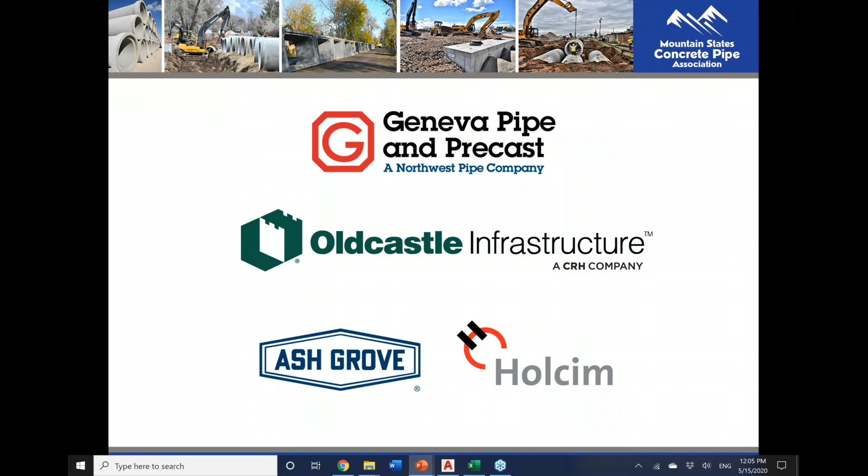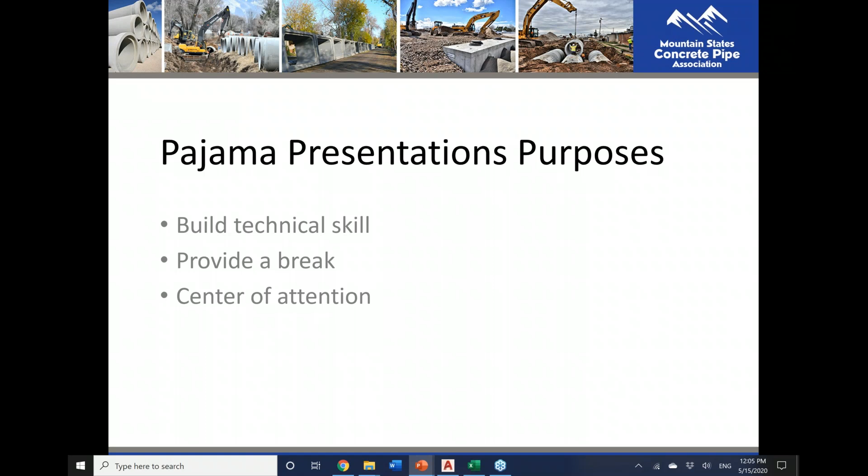Here is my pajamas today. This is courtesy of Heather Christensen, and her deciding this is what I should wear. Here you have it. There it is, my flying squirrel jammies, Heather. What is it? Is it everything you hoped it would be? I got it. From the picture on Amazon or wherever you purchased, they looked a little bit higher quality. It's actually pretty high quality, to be honest with you. It's pretty comfy. Oh man. Can we get a picture of you jumping off the garage? Yeah, absolutely. I will video that later of me jumping off the garage in my flying squirrel suit. That is not a bad idea. Not a bad idea at all.

I didn't really think these would go for so long or have any popularity at all. But I saved my pajama picture for a later one. Oh, you saved your pajama. Oh, great. Let's see. Is it PG? Yeah, can you see it? I'm not even looking at webcams, right? I'm not looking at your webcam. You bunny rabbit. It's a mountain goat.

You're a bunny rabbit. And we purchased that for Steve Oldham's retirement because someone had accused him of being the goat man that used to dress up as a goat and go up on Willard Peak. And so that's a shout out to Steve. We got him the pajamas, and they may not have been clean when we got them to him. Well, anyway, if you want, Randy, feel free to send that to me. I'll go ahead and put it in my presentation for next week.

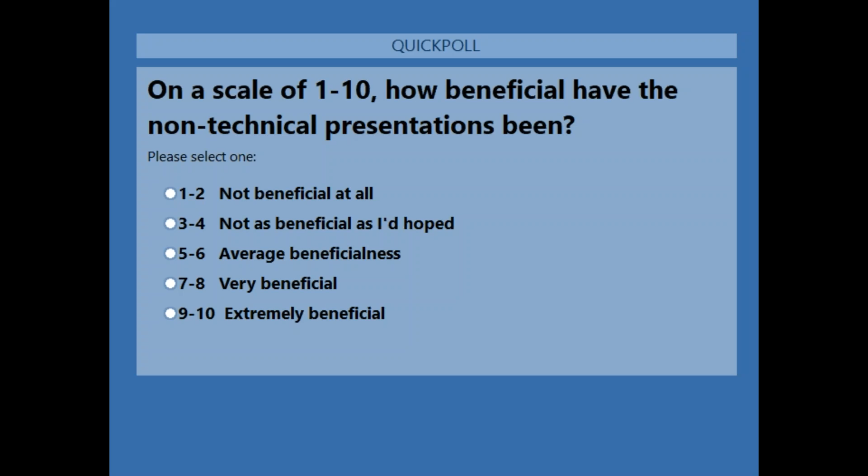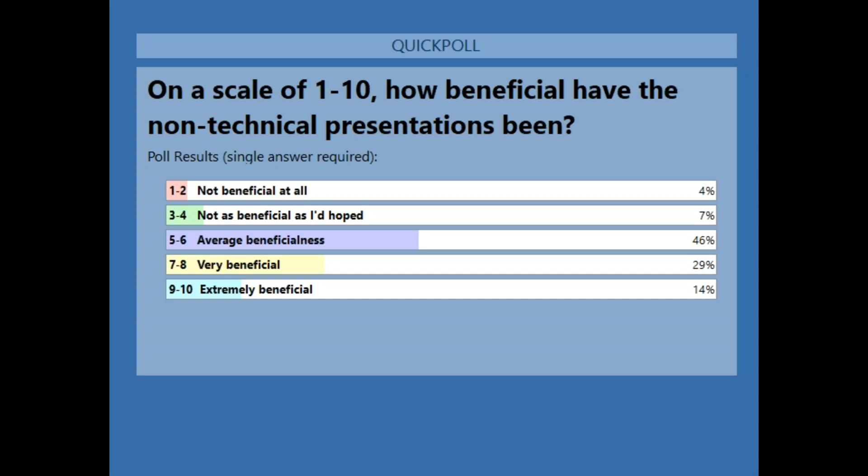Okay perfect, wonderful, wonderful. I'll give it just a couple more seconds here. Okay, I'm going to close that out and share it. Here we go. All right, so you can see it's pretty similar, but a little bit more on the high end of very to extremely beneficial - a few more that did. That's great. Excellent, thank you very much for that.

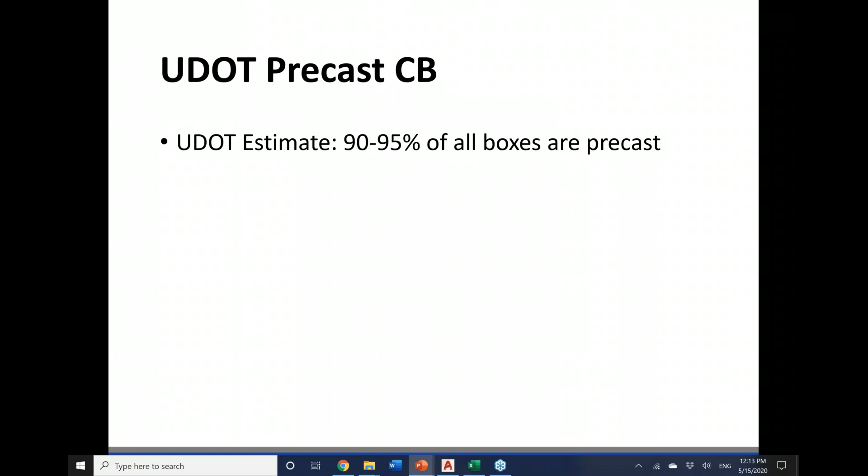So let's jump right into the UDOT precast catch basins. As we met with UDOT, we estimated that between 90 and 95% of all the boxes done in UDOT are actually precast. However, we have to do a design because most of the standard drawings are cast in place, so there's a special design, submittals, and a review and QC process. It's really cumbersome and a lot of work for UDOT and for us.

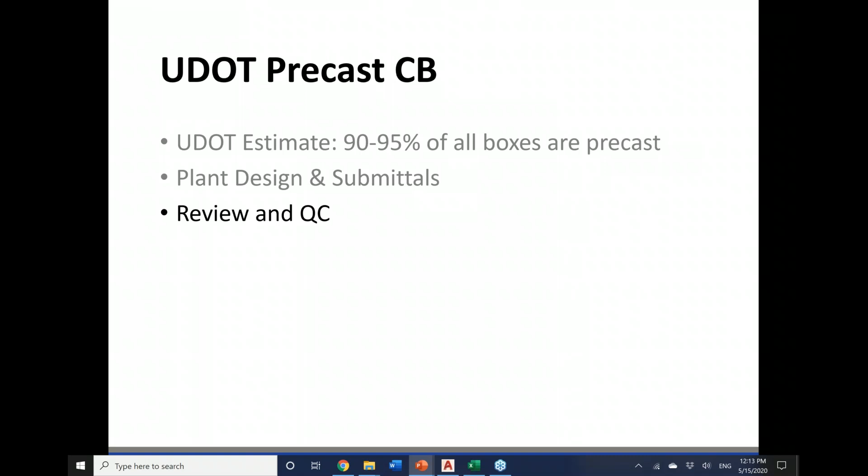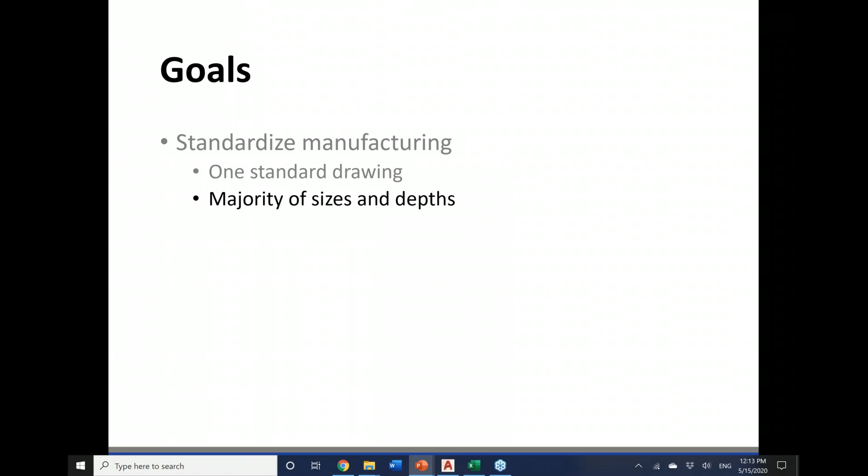So our goals were to standardize manufacturing and have just one standard drawing that would show a majority of sizes and depths so we could capture as many as we could, and also standardize the design process, as well as eliminate these large submittal packages that the REs and structures group were reviewing at UDOT. That was our main goal as we first started meeting with UDOT a few years ago.

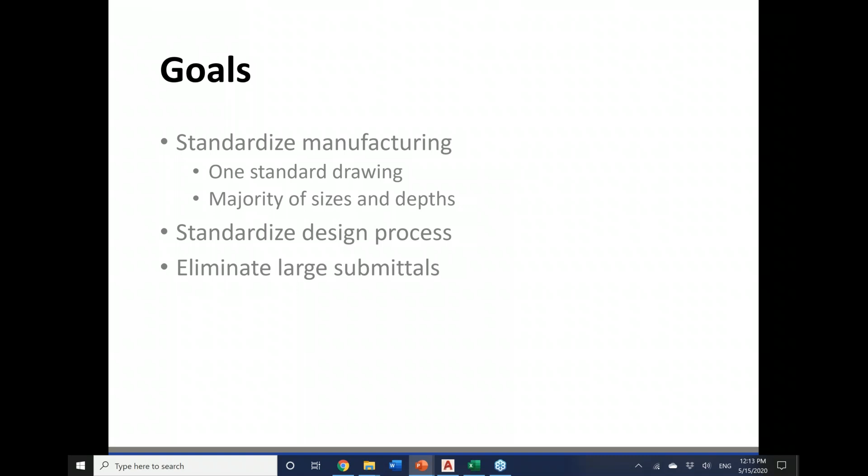This is a couple of examples. This is the CB5, a cast-in-place catch basin. You can see it goes from 4 feet to 8 feet in length, perpendicular to the grate and the direction of flow of your storm drain. It's a standard 5-foot width, and that's your outside width, so that would be 4 foot internal typically, and that goes from 4 feet to 12 feet deep.

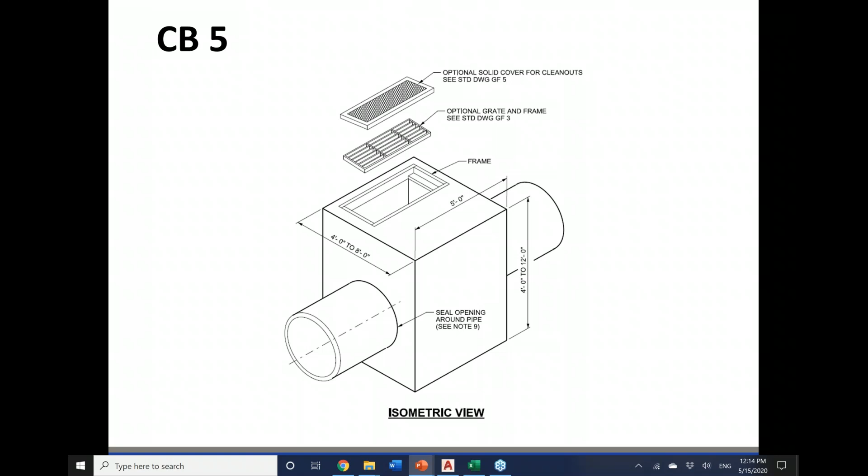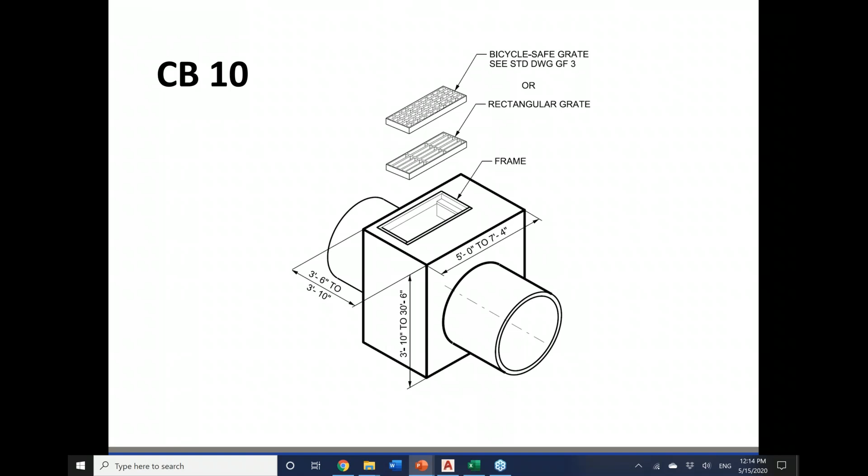The CB9 is kind of similar, also a cast-in-place drawing. This goes 4 feet to 8 feet, perpendicular to the flow where that pipe is showing, and it's typically about 5 feet wide, but this one goes from 3 foot 10 inches to 30 feet 6 inches deep. CB10 is similar, but it's the opposite direction where it can go wider, so if you need your pipe coming into your box on the other side, this is where the CB10 is.

Now a few years ago, and Randy was involved in this, this was before I got there. I want to say it was about 10 years ago. Am I correct, Randy? Or was it a little bit longer? When was it, 2012? Probably about 10 years.

Okay, so about 10 years ago, the Mountain States Concrete Pipe Association and our manufacturers went to UDOT and said, we need to have some option for precast because we're doing so many precast things, let's look at adopting a precast drawing. So they put in this precast spec, or standard drawing.

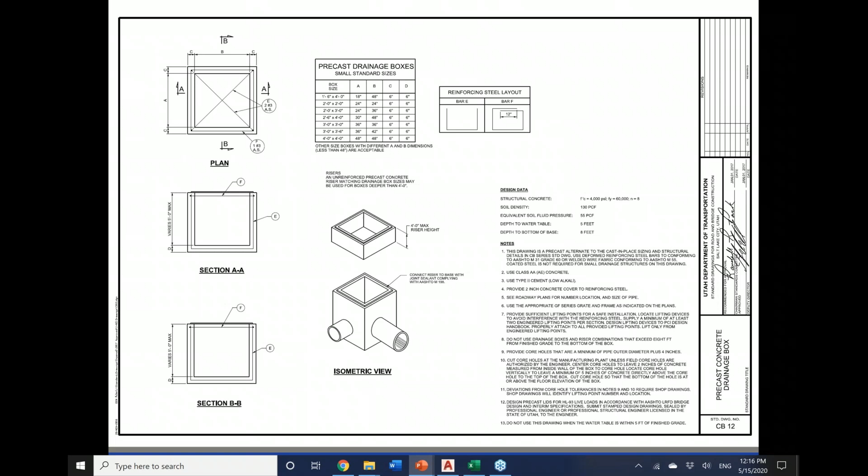This is CB12. A couple things about this though, this is why we're trying to update these now, is there are some restrictions here. Number one, it's non-reinforced, so we're restricted on how big and how deep we can go. That means there's really no structural steel in any of these boxes, only handling steel. You could see that on section AA and section BB, there's a little bit of steel, but that's just in the corners for handling so the box doesn't get damaged while we're transporting and moving it around.

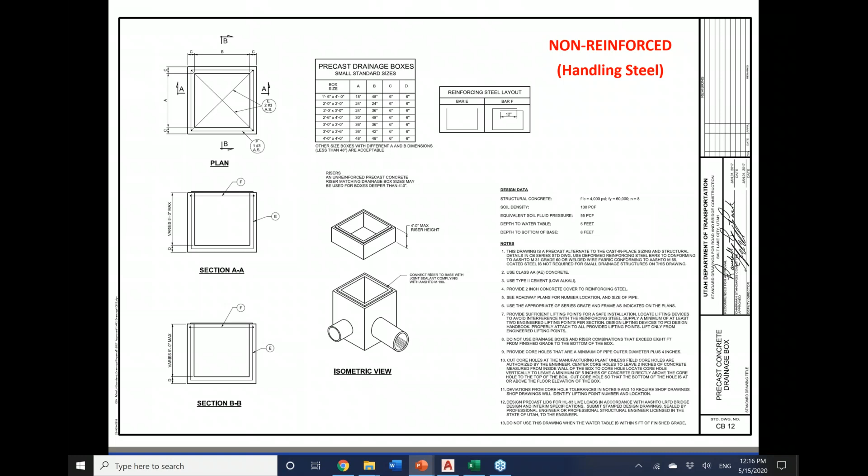As you look over here, this is the sizes of the boxes that you can go. I'll zoom in on that in a moment and show you a couple other things. The depth to the bottom of the base, the maximum depth from the top of your grate to the bottom of the base, not the flow line but the bottom of your base, is 8 feet.

So that's the deepest that we can go on these. We need to provide core holes that are a minimum of pipe diameter plus 4 inches, which would be 2 inches on either side. So if you have a pipe diameter of 18 inches, the outside diameter of an 18-inch pipe with 2.5 inches thickness would add 5 inches. So your 18 inches becomes 23 inches. Add 4 inches and it's 27 inches.

So keep that in mind. You need to cut the core holes at the plant, and center the core holes to leave 2 inches of concrete measured from the inside wall of the box to the core hole, and locate the core hole vertically to leave a minimum of 5 inches of concrete directly above the core hole to the top of the box. That's something to keep in mind, and we'll talk about that later.

Do not use this drawing when the water table is within 5 feet of finished grade. So if your water table is above 5 feet, say 4.5 feet, you're not allowed to use it. Now the interesting thing is, what if your box is only 4 feet deep and the water table is at 4.5? Unfortunately, you still wouldn't be able to use this even though the box is above the water table.

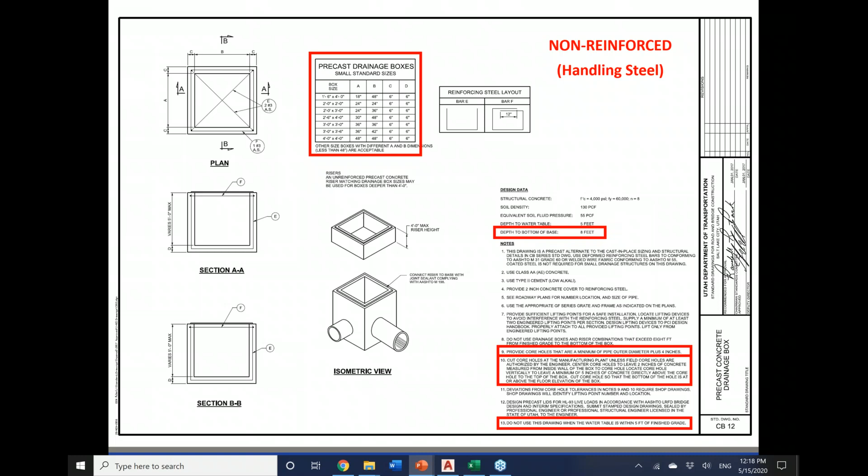It's kind of interesting. All right, I said I would zoom in on that box. These are the sizes that you're restricted to right now on CB12. You can go a 1.5 by 4 foot box all the way up to a 4 by 4. And remember, only 8 feet deep to the bottom of the box.

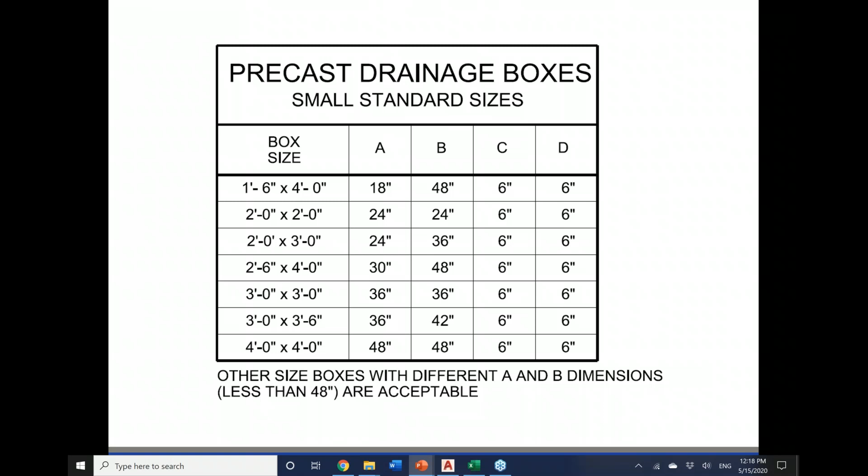There's quite a few applications you can use this on, but unfortunately, if you get deeper than 8 feet, or if you have a pipe that's a little bit larger, which we'll go over today to show you your restrictions, then you're going to have to use one of those cast-in-place drawings for now until we get these other ones done.

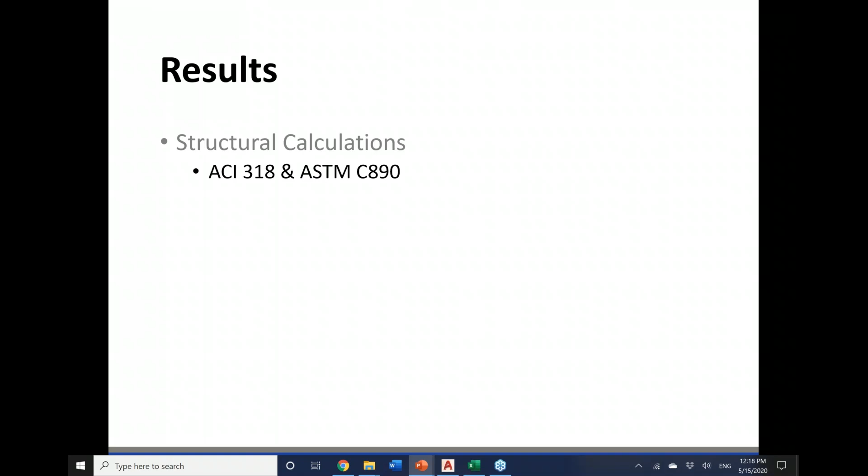We've been doing these structural calculations according to ACI 318 and ASTM C890, and also designed per AASHTO LRFD. Our goal is to put together one standard drawing that would replace CB5, CB9, CB10, and CB12, so we'd be able to consolidate from 4 standard drawings down to just one.

Now, the other standard drawings would all be archived and could still be used if you had a situation where you needed to use cast in place. But for the most part, we're hoping that most people will realize that if we're already doing precast, we can just call them out on this.

And it's going to really simplify the inspection, the RE reviews, the structural reviews, and our submittal process as well. And then we would have a process for special design. So if there's any sizes or any depths, or if there's unusual circumstances, we would have a process for how you can go through and design those.

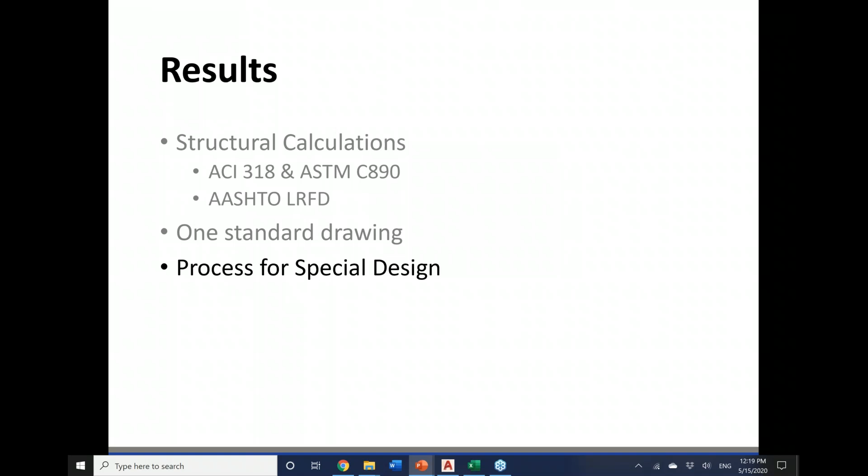And that would mostly be for the manufacturer, so the design engineers shouldn't have to worry about that too much. But that's just for us as manufacturers on what process we need to follow if there's a special design.

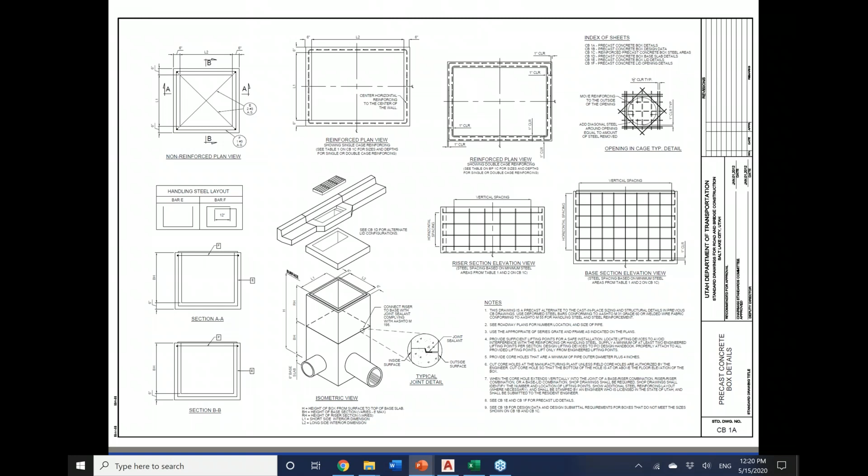Okay, so this is what the drawing looks like currently. This is kind of in a draft form still until we get this finalized in the next couple of months and get it approved, but this is what it would look like. It's similar to the CB12, kind of based on that, but it would give you all the dimensions and everything of the steel and how that works. This is the second sheet that we've put together.

What's cool about this is we have this table. This was requested by our good friend Jeff Erdman. This just is a great table that would show all the design engineers what the acceptable grates and frames are based on box size. So you could look at this table, and if you say, I have a 4x4 and I need to use a GF15, you go over and see, yep, I can use a GF15 — that is acceptable in that 4x4.

Or if you say, well, I've got a 2x3 box, can I use a GF16 in a 2x3? You go over and see, I can't. So it's just a good check there. The other thing that Jeff asked us to put in there that I'm really excited about is this skew angle.

A lot of times, and we'll talk about skew angles today, but a lot of times when we come in at a skew angle, it affects the size of box we can use. So this is the minimum L1 or L2, which if I go back to table 1, that just gives your length, right? That's the size of your box. And that would be the dimension of your box there, and that would be your inside dimension, okay?

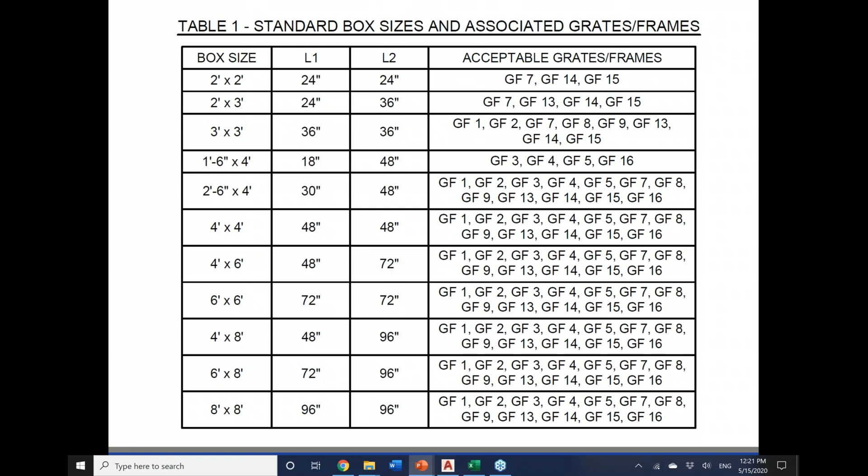So your minimum lengths based on skew angle. So if you had a 30-inch pipe, for instance, and you came in at a 25-degree skew angle, or we'll keep it easy, you go to a 20-degree skew angle, it would be 4 feet width. So you would have to have a minimum 4x4 box. And if you needed a 27-degree skew, then you would go up to the 30, and that would be 30 degrees, and that would be a 5x5. So now you would need to increase the size of your box.

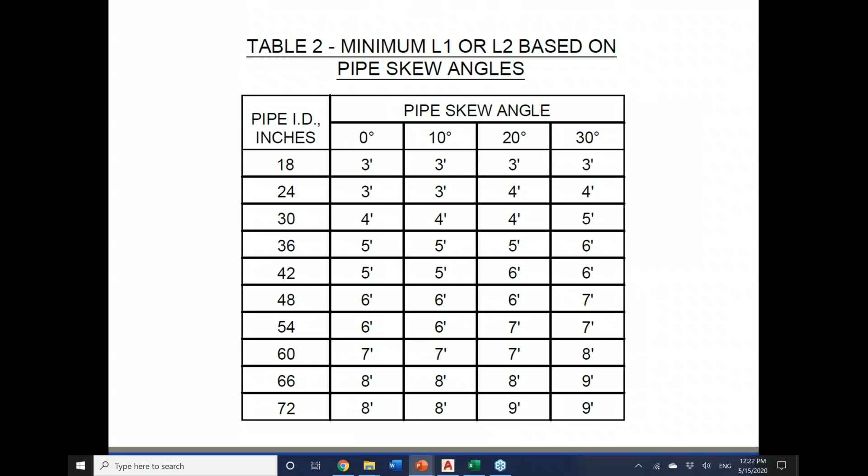But this is a good check for designers so that they can check their skew angle to make sure that their pipes can fit. Now in that handout, hopefully you all had a chance to download it, you'll be able to go through and calculate this if your skew angle is different, or if you have multiple pipes coming in and different things, and just a good check. So I've got all of that included in that handout, and we'll be walking through that today.

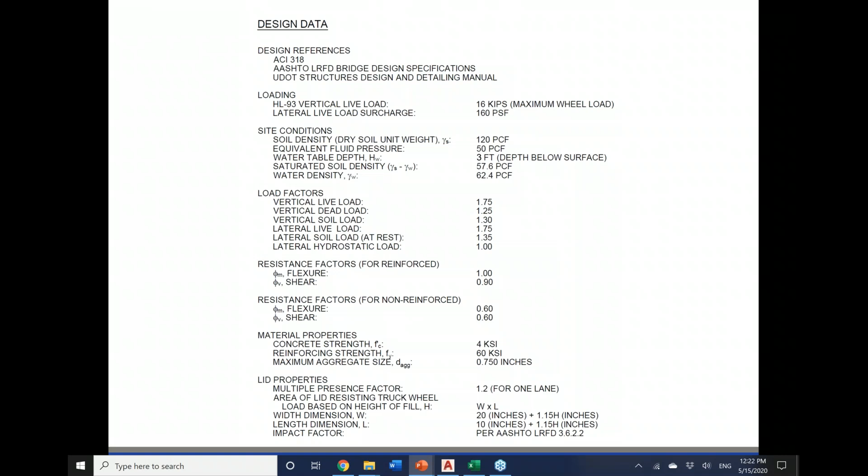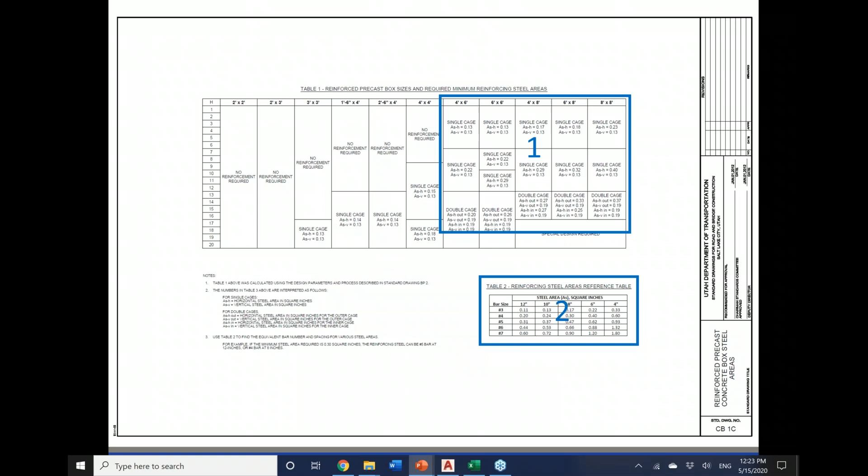And this is what the new table will look like, something like this. This just gives you the dimensions. I'm going to zoom in on this area here, and then on this next. So the first area, I've got my 4x6 box on the left, and then I've got incremental depths going all the way up to an 8x8, and it says up to 6 feet. Each of those require a single cage. Up to 12 feet, they all still require a single cage, and you've got your horizontal and vertical steel areas, in square inches, what your steel area needs.

If you notice, once you get past 12 feet deep, you need to change to a double cage. So it would be a double cage situation where you've got your outside steel and your inside steel, and then you've got your horizontal and vertical steel areas. So it's a little bit easier to read than the other one. This is just a reference table here.

So maybe a manufacturer has a bunch of number 4 bars laying around, and maybe the steel area required was 0.29, right? So they would say, all right, it's 0.29. If I'm using number 5s, I could do number 5s at 12 inches. Or if I'm doing number 4s, I could do number 4s at 8 inches. So it all depends on the availability, how quick the manufacturer can get those in, what they have in stock. So it really allows some flexibility instead of just saying in the design, you have to do number 5s at this, number 4s at this, and that's typically how it's been in the past.

But this gives them the flexibility. You can save some money and some time, and it's going to make it really nice for the manufacturers to be able to adjust on the fly like that. So for example, a 4x4 box 10 feet deep. This is just a quick example we'll do. So we go over to the table, we look in this area here, we zoom in, we go to our 4x4, we go to 10 feet deep.

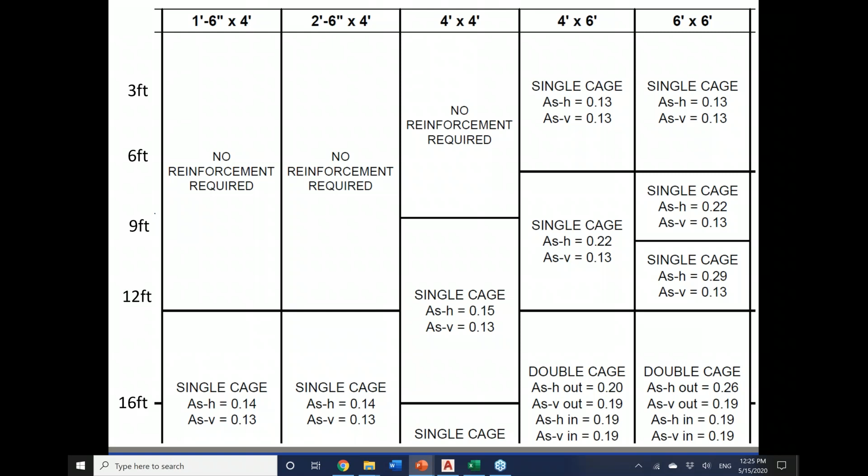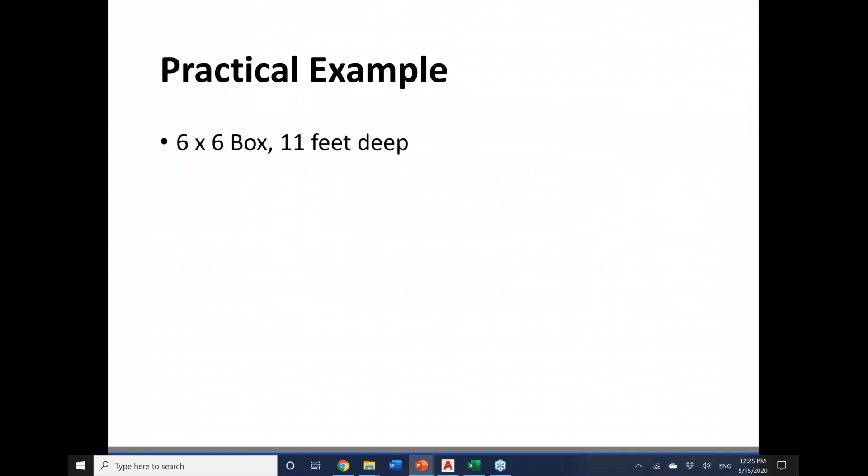Let's look at another one, 6x6, 11 feet deep. All right, so again, we go to our table, we go over to this side of the table, we would pull that up, a 6x6. Here, we zoom in. Hold on here, sorry, I forgot. 11 feet deep, sorry, I got distracted. 11 feet deep, so we go over to here. We look in that group between the 9 and 12 feet. It's a single cage. Horizontal steel is 0.29. Vertical steel is 0.13. So it's in that little box there. So we would go 0.29.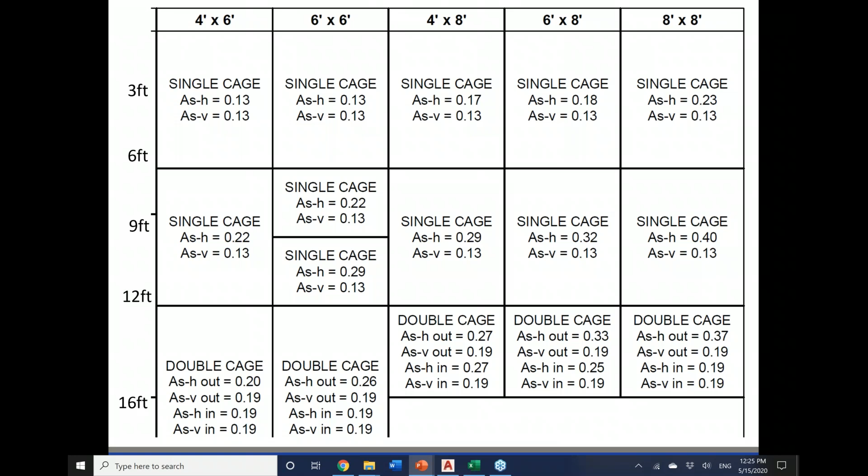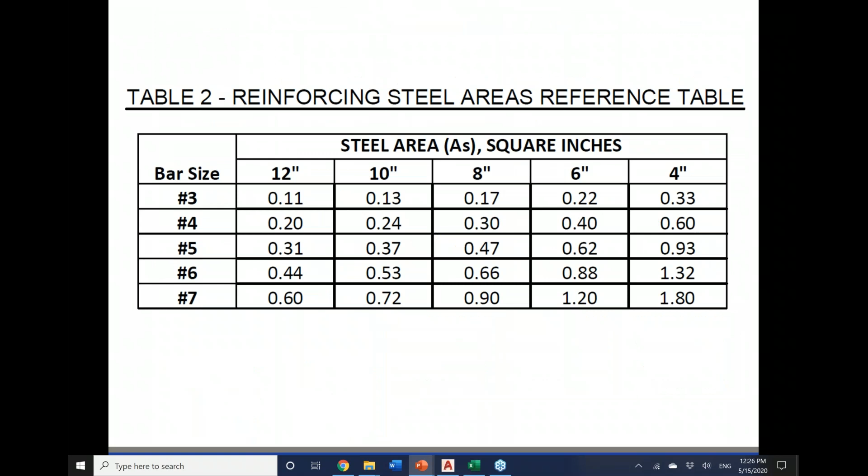You'd come over to this table and say, okay, I've got number 5s, I want to use number 5s. We're going to go number 5 at 12 for our horizontal steel. And for our vertical, it's a minimum steel, so it's 0.13. So we'll go ahead and just use number 3s at 10 inches there for our vertical. So that'll make that easy there. So it really gives some good flexibility to our manufacturers, and we're really excited about that.

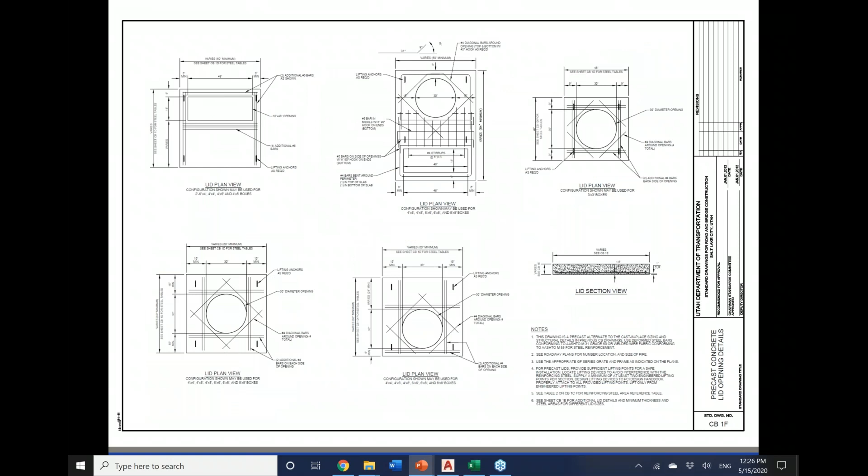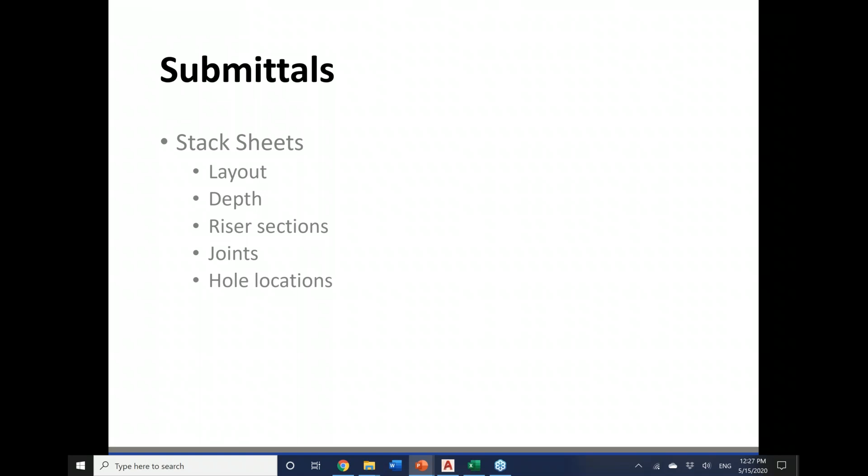However, right now, with every individual box we do, we have to submit a design. So we would have to go through and do calculations and design and show that what we're proposing for precast works. When these standard drawings are approved, we'll be able to get rid of that design component of it, but we would still have these submittals of these stack sheets. So I'm going to go through and show you some of these stack sheets here. This is what a typical stack sheet looks like.

I want to point out a couple of things. If you notice down at the lower right hand corner there, you see where it says right, back 48, left 48, front. This shows the hole locations. In that table, you can see there's 18-inch concrete pipe coming in invert 1, a 12-inch concrete pipe in invert 2, 18-inch concrete pipe in invert 3. So notice that because of how this box is sized and depending on how we manufacture it, 1 and 3 are really good. We can make that work. Unfortunately, notice that number 2 is right in the middle of that line there.

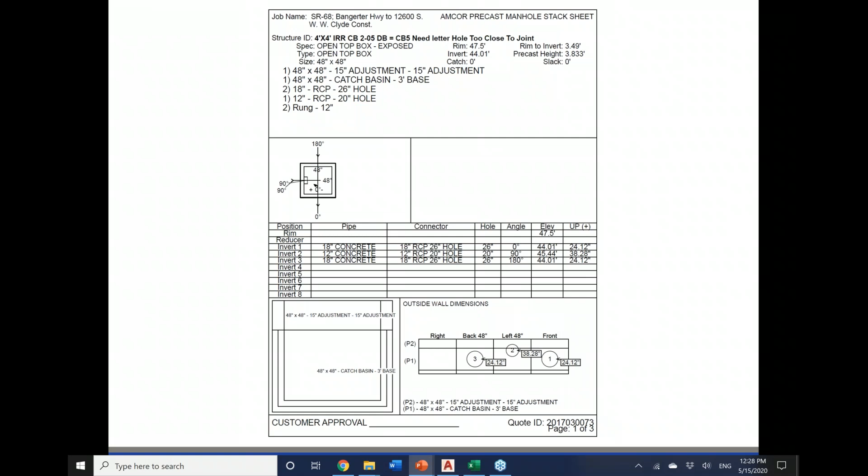So what we've been requested on this pipe here, I don't know if you could tell, but it says over on the left-hand side, 48 inch by 48 inch, 15 inch adjustment. And so that means the contractor is planning on pouring the lid in place out in the field. And so we're not able to have our riser go up. So unfortunately, there's a core hole there that's going to be right in the top of the box. And this is what we try to avoid as much as possible. But unfortunately, there's times where it's just unavoidable.

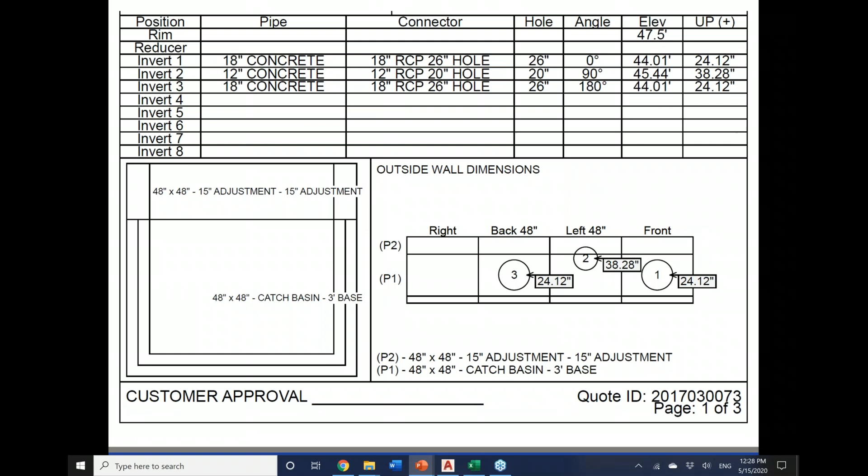And so it's really interesting there where you've got that situation where the top of it there doesn't quite fit in the riser. This is a situation that we have to address case by case and look at there. So hey, Jason. Yeah, Randy. As much as we'd like to avoid that, there's a lot of shallow drainage where we just have to deal with that. But where they're pouring that lid out in the field, it is really easy for them to tie that back together, and it works out fine.

Yeah, we had an example. Someone showed us one time, and this is where it's great, where they do that cast-in-place lid where they pour it out in the field, and they're able to reinforce around it and put that in there. So it is good. We had a situation one time where I think it was Jeff that showed us a picture where the pipe was put in and then the contractor used a precast lid and it sat on top of the pipe, and it was about 2 inches above the top of that riser.

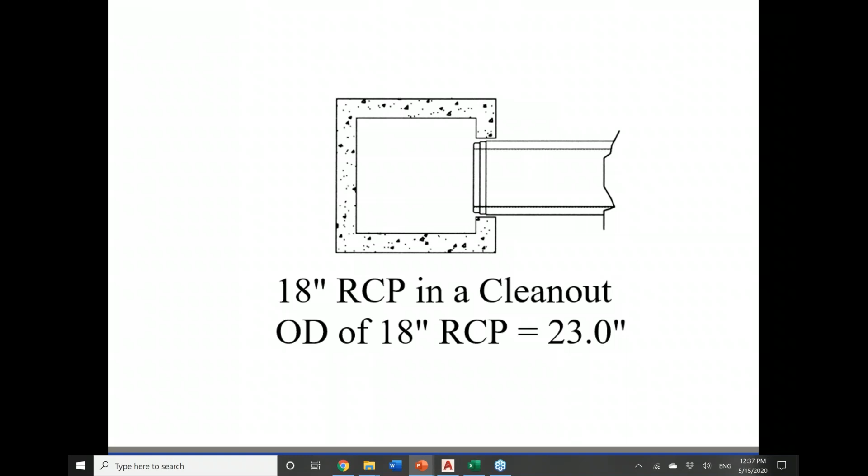Let's look at this. This is also on that handout here. This is what it looks like with an 18-inch RCP, and the cleanout outside diameter of 18-inch RCP would be 23 inches. So we look at that and it comes in at that. Now, when we look at a 15-degree skew angle, this is the calculation that Randy actually did for all of these. He populated this table based on this calculation here. Your 18-inch RCP coming in at a skew angle of 15 degrees. So you take your outside diameter, and then you times it by 1 over the cosine of 15 degrees, plus the tangent of 15 degrees times the wall thickness.

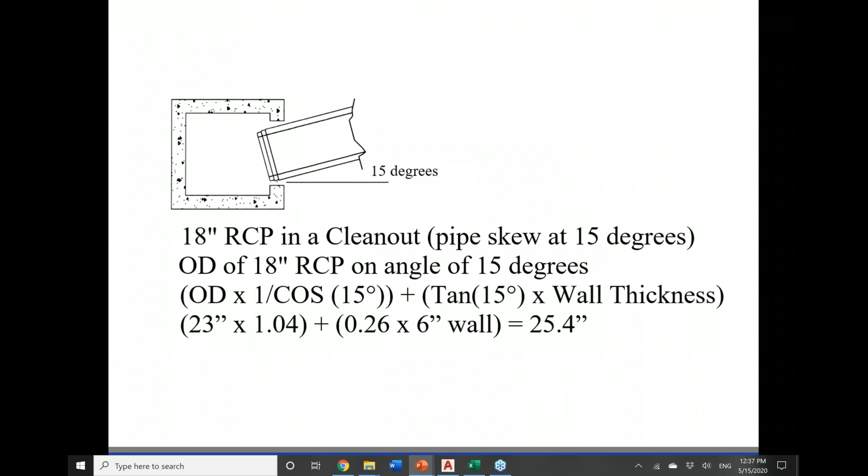Which would be your 23 times 1.04 plus 0.26 times 6 inch wall. So you get 25.4 inches is now your new outside diameter. So that's the calculation that was used to populate this table. So instead of doing that calculation every time, you can go to the table. Here's our 18 inch.

If it's a 0 degree skew, it's 23 inch outside diameter. If it's a 15 degree skew, it's a 25.4 inch outside diameter. So keep that in mind when you're thinking, okay, will this pipe fit if it comes in at a skew angle?

Now, I know there are some programs. When I was doing design for UDOT drainage projects, MicroStation had the storm and sanitary I was using. That would typically calculate and try to do that. But I always go through and check by hand as well. Just look at this table and make sure that I sized my box correctly.

I don't want to miss anything and get out in the field and realize I called out a 4x4 and I should have called out a 5x5. So keep that in mind. And that's why we're trying to put that table on the UDOT one too, to help you see. And that's what we based it all off of, this table.

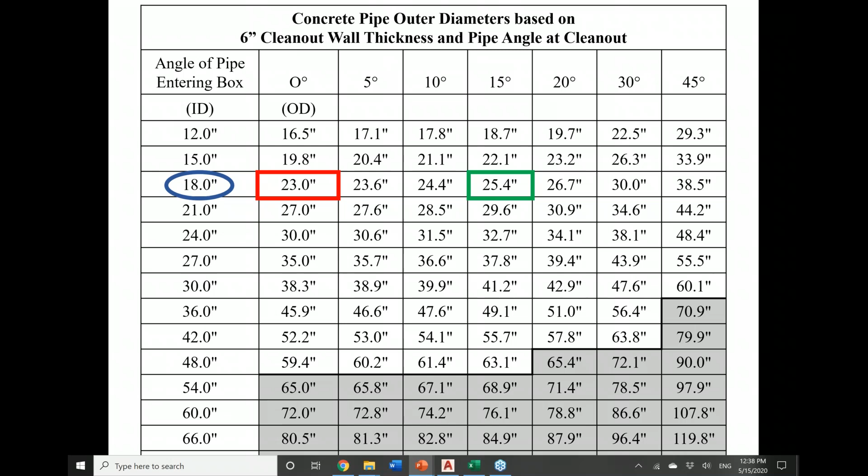We don't typically see many 21 inches anymore, but if you dig up old pipes, sometimes you'll see a 21 or a 27 inch. But you could go a 15 or an 18 inch pipe in a 3 foot box, but you couldn't go any bigger than that. So your 24 inch, you'd have to go up to your 4 foot box.

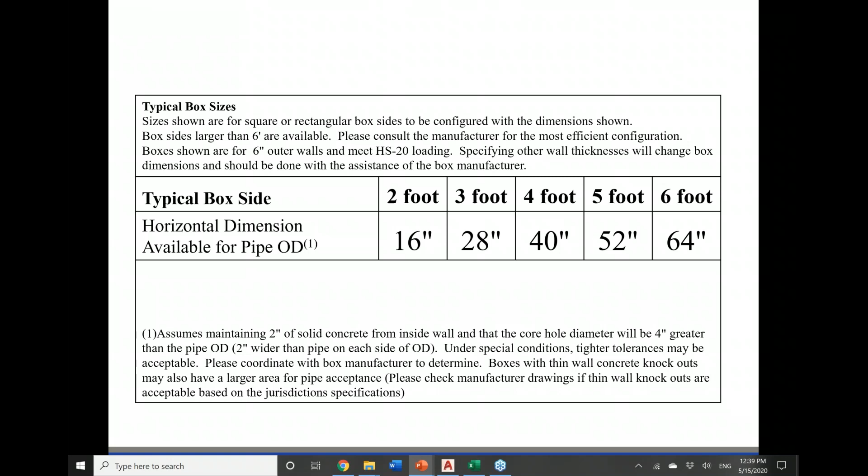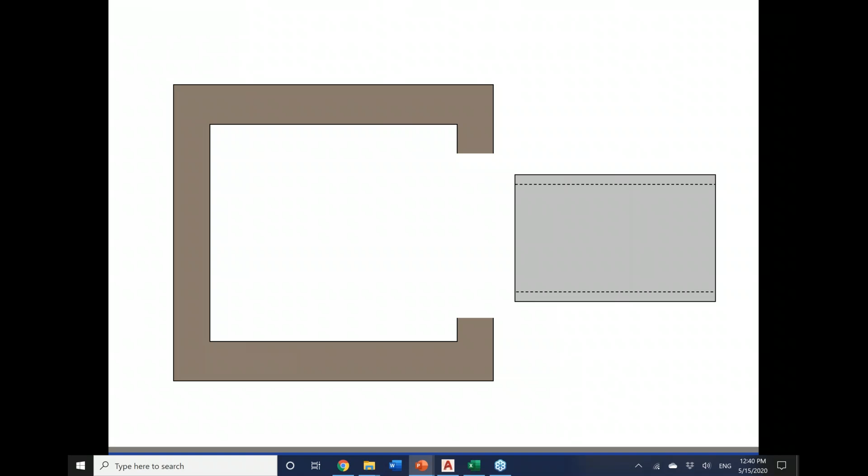So this is the situation that we see sometimes, where you've got your box with the hole that's available there, because you've got to keep a couple of inches on either side of it to make sure that we're okay. And we don't want to see this situation out in the field. This is much better. So make sure that we're checking that out. All right. And that goes through the first couple of pages of that handout.

Okay, we'll let you keep going here for a minute. All righty.

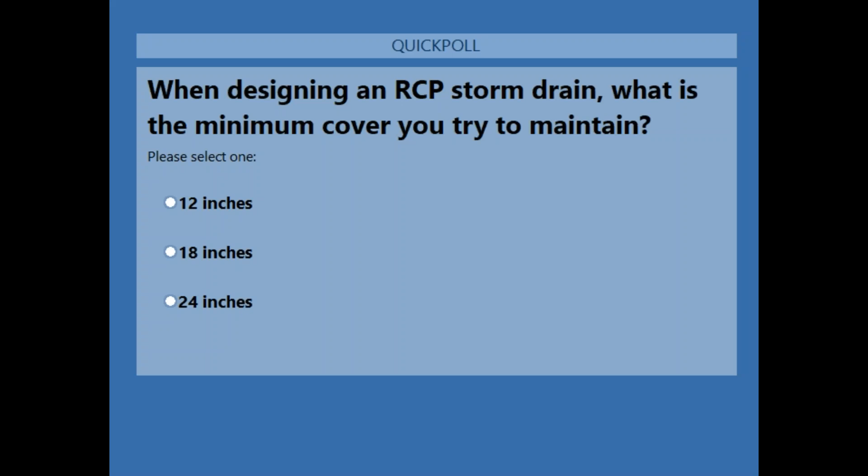Okay, perfect. Now, fair warning, I meant to ask this before this slide to see if it changed the results, but it looks like some of you beat me to it, where I'm saying the minimum suggested cover is 23 inches. A lot of times we get calls and people say, hey, I've got minimum cover. What are my options here?

Now, realistically, and we've talked about this every week, concrete pipe is a structure. We can design this structure to handle any load. But what we need to step back and look at is, a lot of people will take that as, oh, wow, I could do 6 inches of cover over a pipe.

In some situations, sure, that's probably a possibility. But what we don't realize when we're looking at 6 inch cover on a pipe is, well, what about the bell hole, the bell that comes up and sticks up? Is that going to stick into our pavement section? What is our asphalt pavement? You don't want your pipe in your asphalt or concrete pavement section if you can avoid it. What about in your base course? Do you want it sticking up into there? Those are things we just look at and say, okay, 12 inches of cover, we're good.

But then you start thinking, okay, how's this going to tie into the box? How's this going to tie into a manhole or a catch basin? What's going to happen there? How do we do that? How can we tie that in? Is it really going to work?

So this one says 23 inches is the recommended depth for this. Okay, so I'm going to hide that now and we're going to go back into this presentation. So 23 inches, we need to keep that in mind.

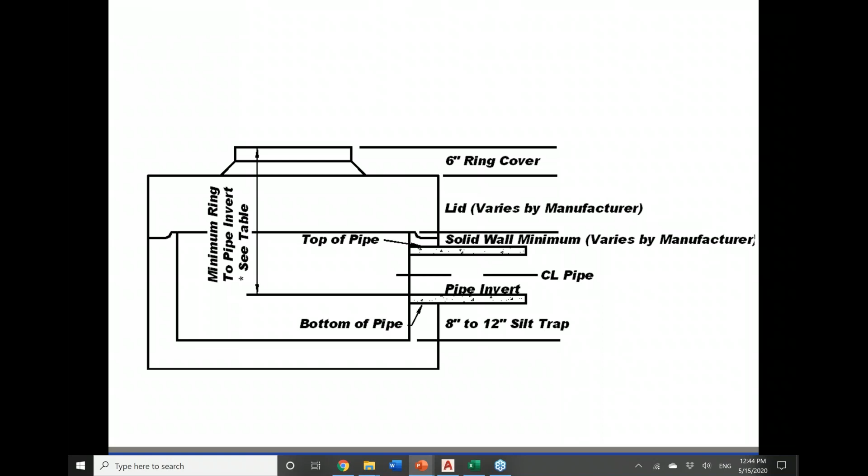We have to make sure we're leaving 5 inches. So we've got our 6-inch lid, our riser, and then our 5 inches. So when you start looking at it—actually this is for a 12-inch lid, I apologize—so 6-inch ring and cover, your 12-inch lid, and then your 5 inches. That's where we get that 23-inch recommendation. That lid can change and vary, getting a little smaller than 12 inches, but it's a good rule of thumb.

We do have some options when we start looking through this. This table gives you your minimum difference from ring to pipe invert. So this is a good table to have too, where you're looking at it and going, okay, I've got a 24-inch pipe, what is my minimum depth to the invert of that 24-inch pipe? And I look over and say, okay, it's 50 inches. That would give me that 23-inch cover, so I've got my 5 inches in the pipe, and then my 2-inch core hole. Just keep those in mind, that's something we really need to keep in mind.

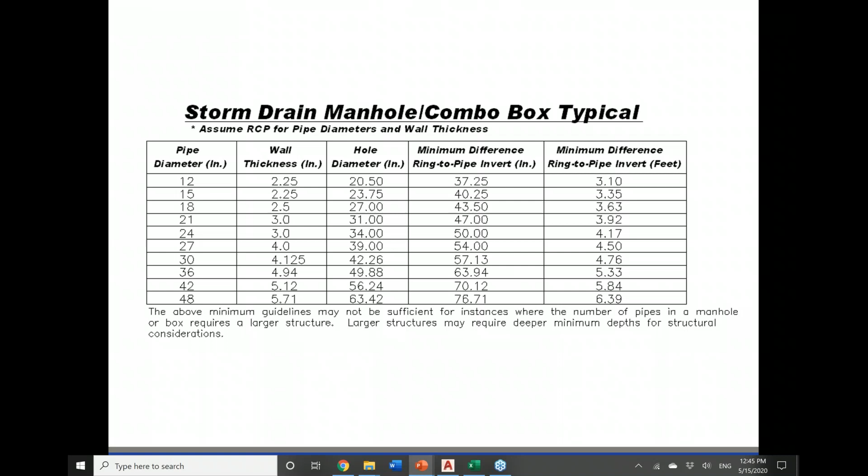Okay. Hey, Jason. Yeah, Randy, go ahead.

So all of these are great guidelines, and if you hit this guideline, you don't need to spend a bunch of extra time or call us or do anything else. Doesn't mean that we can't make things work a lot of the time, it's just giving you an idea. Try and stay in the guidelines and be conservative where you can, and if you can't, then we need to think about it a little bit more and make sure what's happening. Absolutely, you're right there.

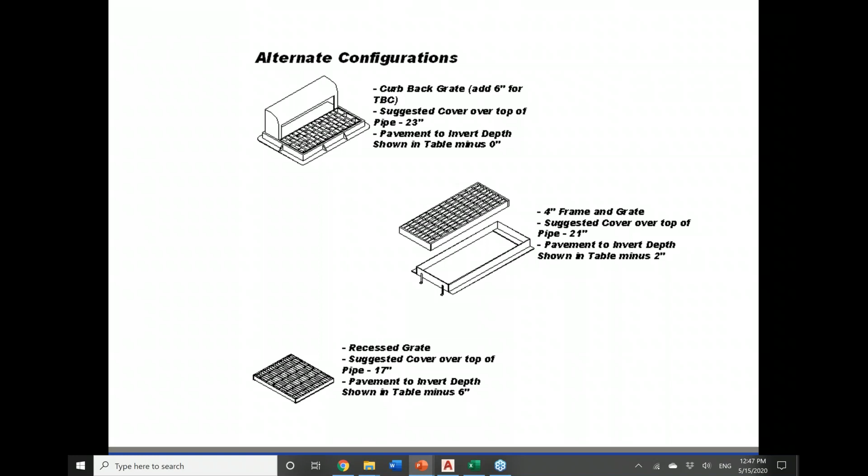This is an example of that recessed grate I was talking about, where we can take that 6 inches off, where the grate is actually, the steel is cast into the box itself, so you have your recessed grate there. This is that example where you've got your 6 inches of your back, your curb there, your hood vent there for your curb. Those are some situations there.

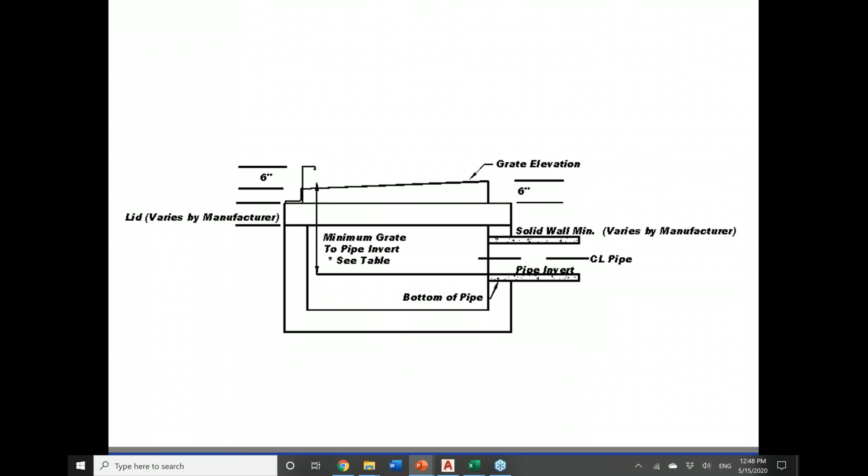Obviously the lid varies depending on the manufacturer, but this is an example where we core the hole in the plant, we've got that distance between there. This is an example of a box with some knockouts that maybe you can use. Those are typically not used on UDOT projects, but APWA does allow certain sizes to do knockouts. This is when we're doing that inlet box.

This is what that table is. So this is your 4th page on your inlet box. Kind of the same thing where you've got your minimum difference grate to pipe invert, so keep that in mind there. This is that configuration, it's the same thing. Pages 3 and 4 are basically the same thing.

One's just your ring and cover for your grate, and this one's more if you're doing like a curb back inlet. This one is the suggested cover over the top of pipe, and this is 19 inches, so keep that in mind there. That's your depth to invert, shown in the table over here. Notice they're a little bit less than some of those other ones that were in the other one with that ring and grate or ring and cover.

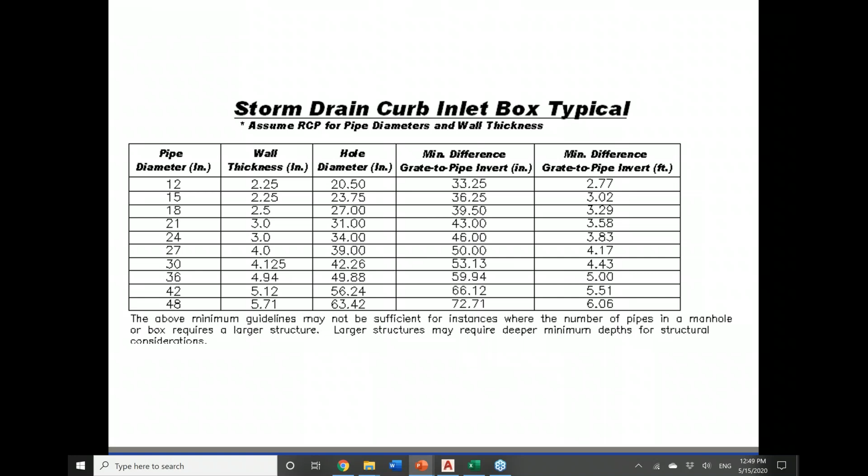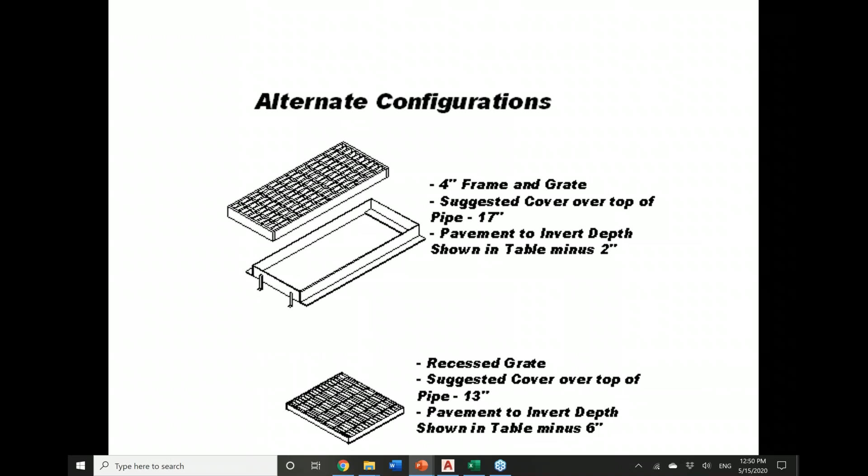So again, alternate configurations. If you just have your frame and grate or a recessed grate, you can subtract the 2 inches or the 6 inches for your recessed grate there. More examples of boxes here and what they look like there.

Okay, let's get into manholes though. This is what I really wanted to get to, so I kind of blew through those other ones.

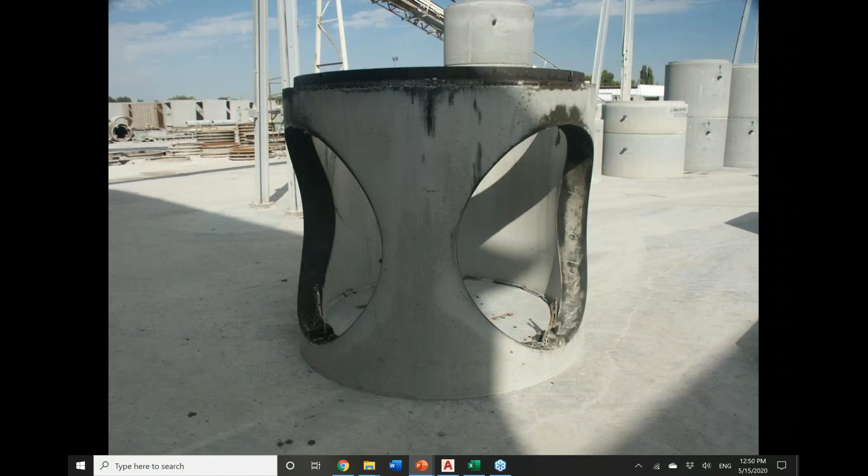Hey Jason, yeah Randy, before you go to the manholes, I think there's some cities and other jurisdictions that on a catch basin, if it's like an 18 by 48, or depending on the size, that grate can fit right on the base and doesn't have to have a separate lid with it, which gets you back down to your like 13 inches of cover or something.

So okay, that's good to know, keep that in mind. Yeah, if it's that 18 by 48, and you can set the grate right on it, so it's kind of a recessed situation where it goes in, and then you've got your curb in around. Okay, that's good to know.

So you'll want to check as a designer, you want to check some of those things and see what you got there. Okay, this is the situation we see every now and then, where you've got 2 pipes coming into a manhole. Very common to have 2 pipes coming in, and then depending on the angle, you want to look and see what that distance is between.

So if you look, this area here, this is that critical point. We have minimum recommendations, this is page 5 of the handout we're going to go over. This is what's called your A distance, we're going to call this A. Keep that in mind, this is that important part in between the 2 pipes there. So when you look at it here, this is your A distance.

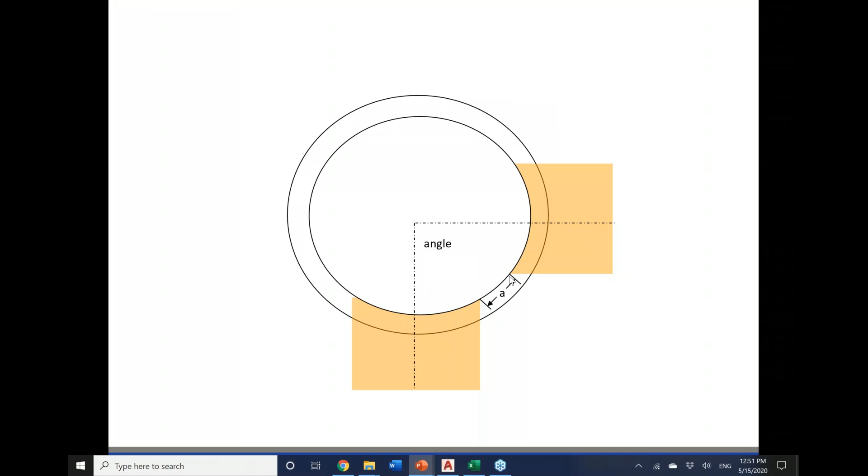And then you've got your angles of your pipe coming in. So when you have multiple pipes coming in at different angles and at multiple elevations, this is page 5 of the handout. We've got a formula here: M times your angle equals Y, and Y is the distance between, if you look on page 5, that's the difference between the angles all the way across that face from the middle of each pipe.

That's that distance there. So M is your circumference divided by 360 degrees. Just look at the table on the right that I have. That's where we've got it. For a 48-inch manhole, your M would be 0.419. For a 72-inch manhole, your M is 0.628. We've got that M value for you already there.

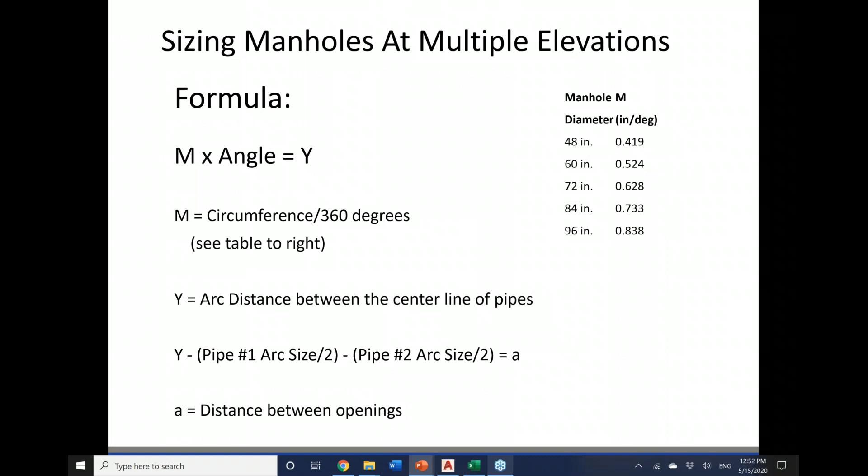So your Y is that arc distance between the center line of the pipes, and your A is figured out by: Y, which is your arc distance, which is your M times your angle, minus your pipe 1 arc size divided by 2, minus pipe 2 arc size divided by 2, equals A. That's that A distance between the openings. I know that's kind of a lot, so let's walk through an example.

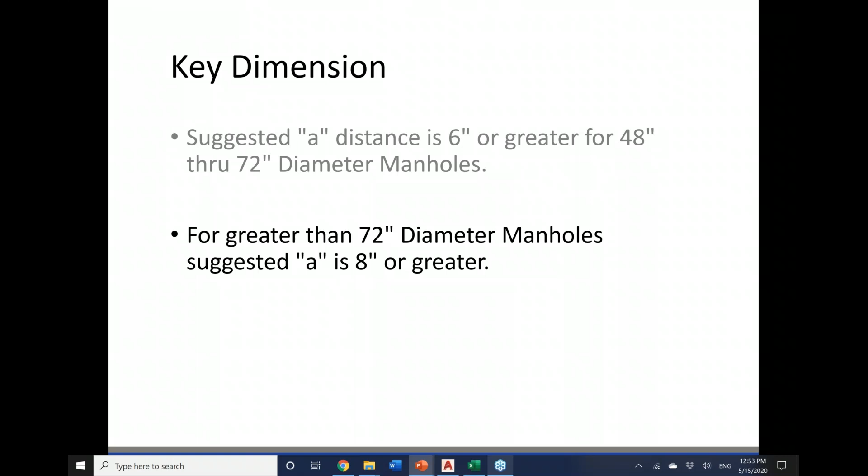Here's that page again. Before we do an example together, we're going to look at the suggested A distances. For 48-inch through 72-inch diameter manholes, the A distance should be 6 inches or greater. So you want to make sure you have at least 6 inches in that A distance. For manholes larger than 72 inches, it is recommended to have 8 inches or greater between there. So we want our A distance to be there.

Now keep in mind that if you have a manhole, your A distance is going to be different on the inside than it is on the outside. This is measured from the inside, so you want to make sure you have 6 inches of material on the inside of that manhole. That's really important to remember. You're looking at it on the outside, and you'll go, oh yeah, we got plenty of room out there. Well, as the pipes come in, depending on the angle they're coming in, you may have much less on the inside. So keep that in mind.

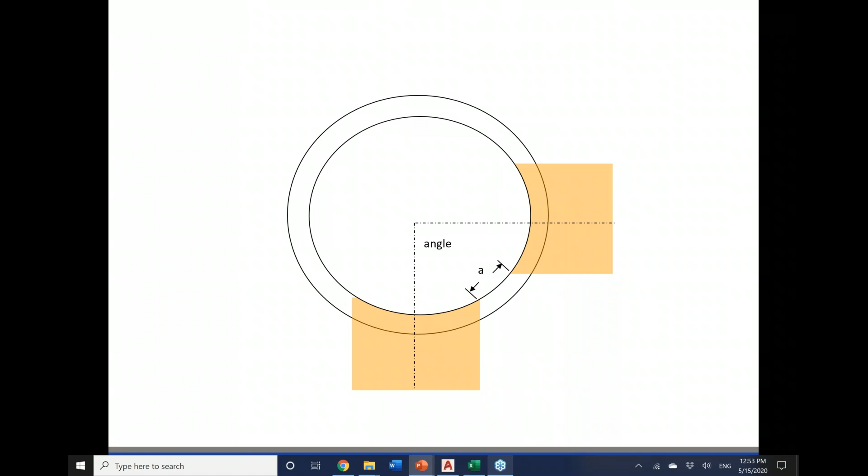All right, so let's do an example. We've got 2 pipes, they're 36-inch pipes coming in at an angle of 90 degrees. So pipe number 1 is 36-inch, set at 90 degrees. We go 0 degrees is directly up, we'll say north, due north is 0 degrees. So 90 degrees is when you go to the right there, and when we go down, the other one is at 180 degrees. So the difference between them would be 90 degrees.

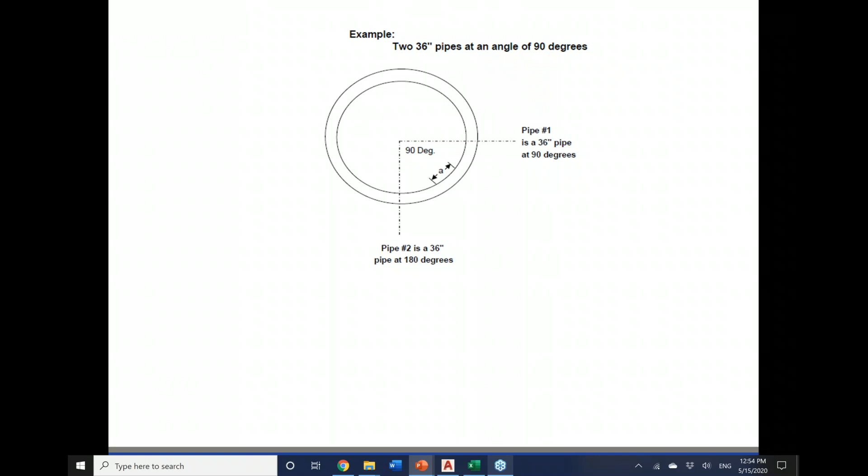Okay, so we need to check that A distance when we're sizing a manhole to make sure that we have the right size. We're going to try a 72-inch diameter manhole. That's going to be our first check, so we're going to say, okay, we're going to try this 6 foot manhole.

So it would be 0.628 times the difference between the two, which is 90 degrees, and we get a value of 56.52. So write that down, keep that there on the edge. You're going to hang on to that one, 56.52.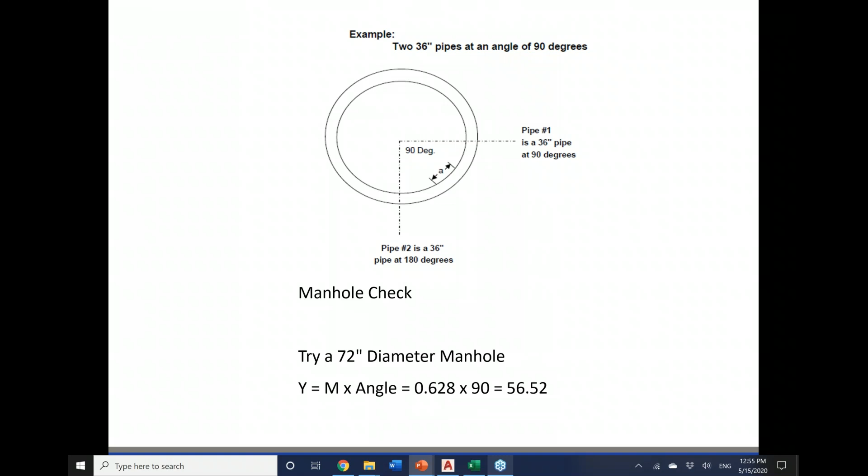Then we go down to the table that's on sheet 5 of the handout, and this is for our arc size. We're going to be able to find our arc size per manhole diameter for different pipes. We've already calculated these for you, so you just go to this table and pull it off. So we said 36-inch pipes. So we find 55.1 is our arc size for a 36-inch pipe. And since we have two 36-inch pipes, that's all we need is that 55.1, okay?

So let's go back to our equation here. A equals Y, which we said was 56.52, minus our first pipe's arc size divided by 2, which is 55.1 divided by 2, minus our second pipe's arc size divided by 2, which is 55.1 divided by 2. So we get 56.52 minus 27.55 minus 27.55, and our A distance is 1.42.

Is that acceptable? No, it is not. Oh, I got it wrong. 1.42 it should be. I wrote that in wrong. I apologize, I was getting ahead of myself this morning. 1.42 is also less than the 6 inches, turns out. So we're going to have to try a larger diameter manhole, okay?

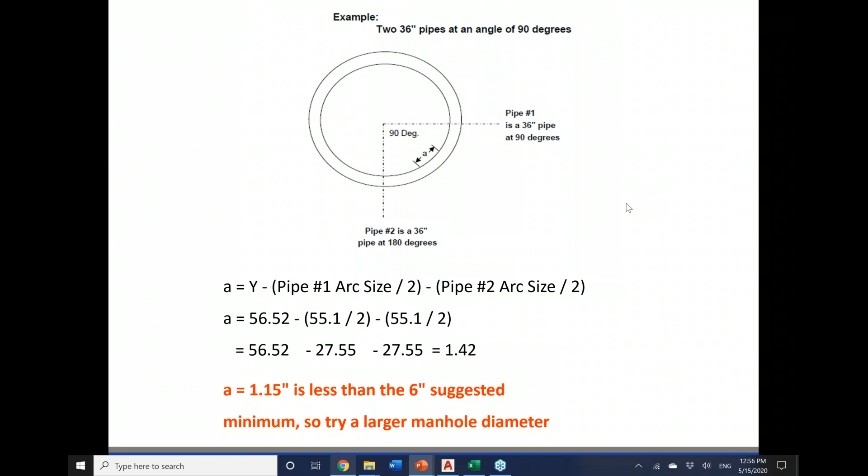So let's try another one. What if we tried an 84-inch diameter manhole? So we step up that next size, now looking at that 7-foot diameter manhole. We do our M where we look at that 84-inch. Our M is 0.733. So we times it by that 90, and we get 65.97. We're going to write that down, 65.97. Okay, perfect. We go over to our table again.

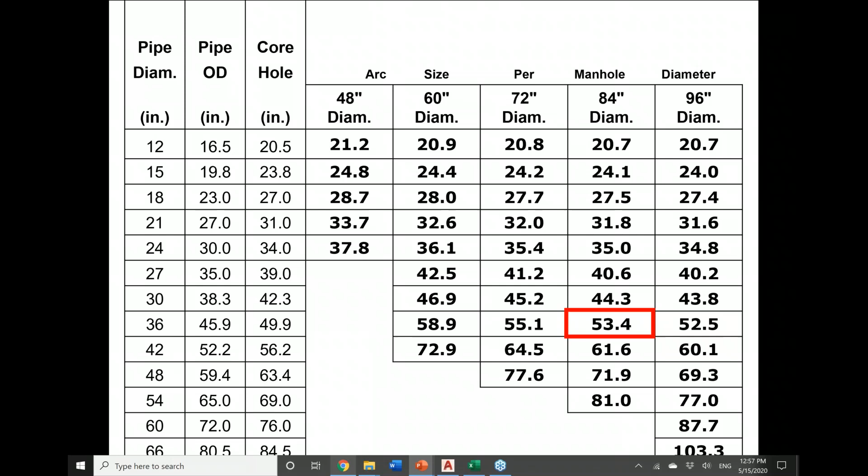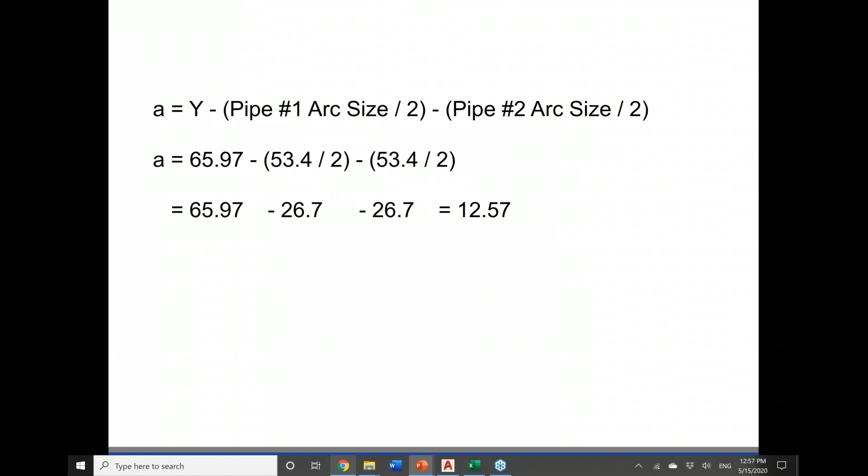Now we go to the 84-inch manhole, and the arc size is 53.4 now, so that's our new arc size for an 84-inch manhole. Our calculation again: Y, 65.97, minus 53.4, our arc size, divided by 2, which is 26.7, minus the arc size for the second pipe, 53.4 divided by 2, 26.7, we get 12.57. 12.57 is more than the 8 inches suggested, because remember, we kicked up to a new size.

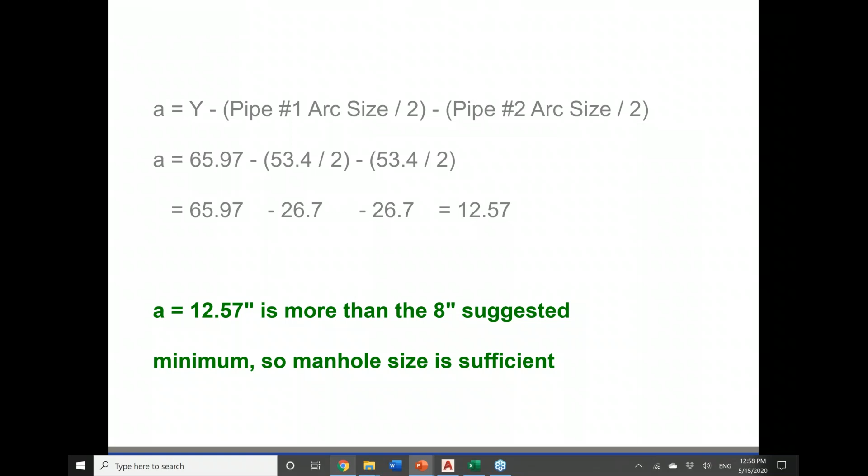84 inch is bigger than 72, so we went from the 6-inch recommendation to the 8-inch. So this manhole size is sufficient. So if we had two 36-inch pipes coming in at a 90-degree angle, we would need an 84-inch manhole.

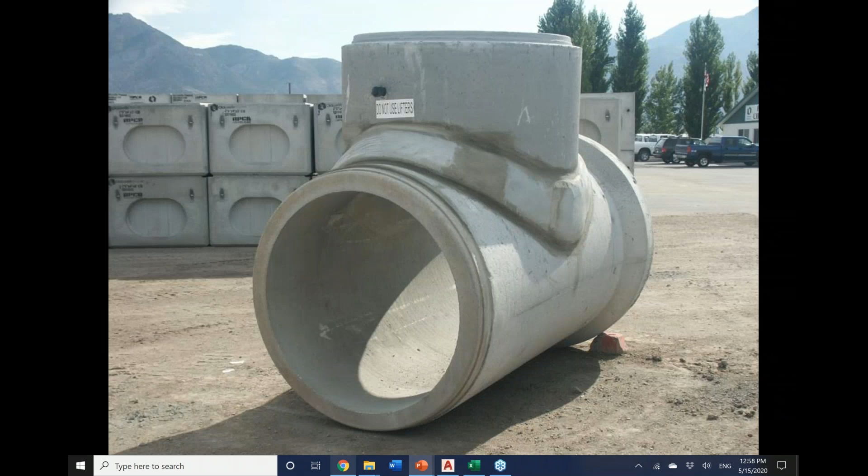So consider that. And this is a picture I've always thought was pretty cool, where they cast another pipe on top. So instead of a manhole, they just have an access point that's been cast into the top. This is something we can do. If we can avoid it, we would, but this is an option as an access into a pipe. Again, we try to avoid this where we can, but it's not always avoidable.

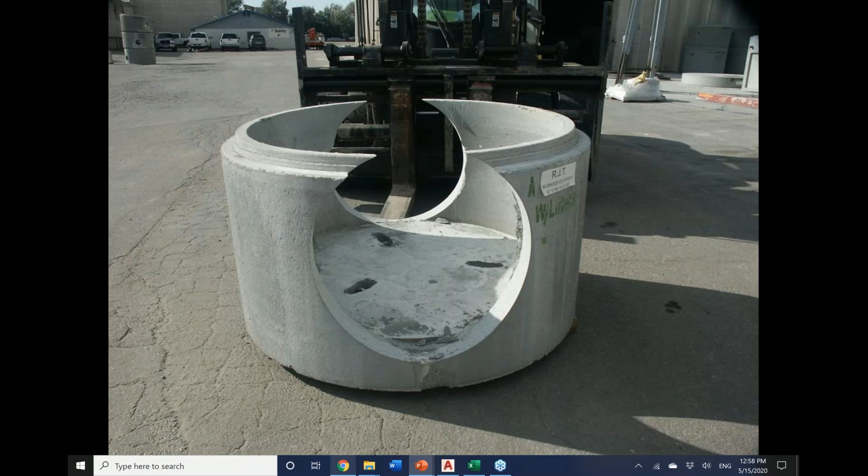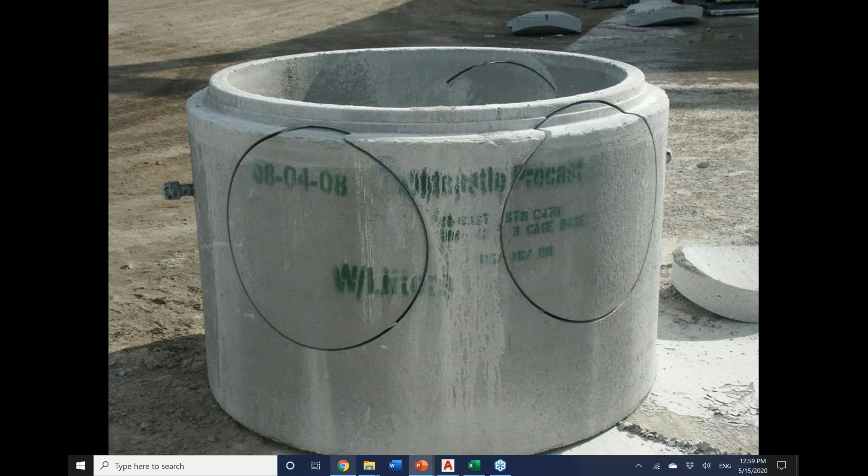But these are a little bit different. Again, manholes, a lot of these are just the handling steel in them. Just other pictures of core holes, coring into the manhole. This is another one that has a good sufficient cover on it. But anyways, just wanted to share those pictures with you.

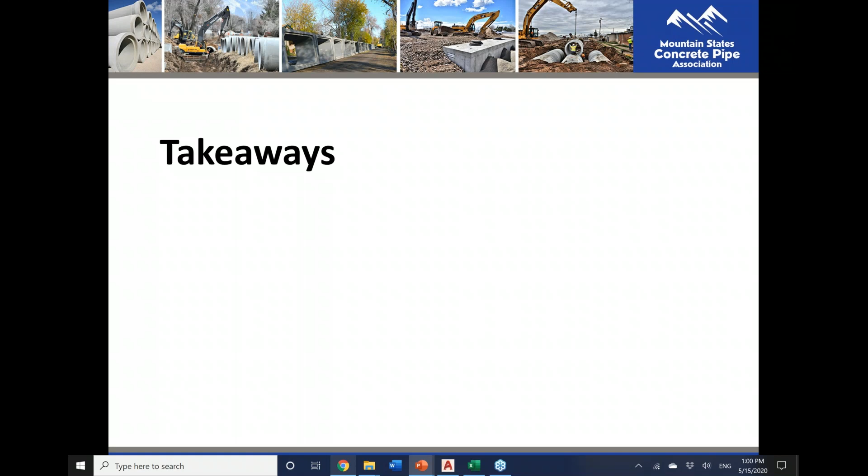We talked about the changes that we're proposing to the UDOT catch basin drawings and that we're working to get approved. We talked about sizing catch basins, what to remember when you've got skew angles and things coming in, your minimum side length of the box for different pipes at skew angles. We talked about sizing manholes when two pipes are coming in at different angles. So that's what we talked about today.